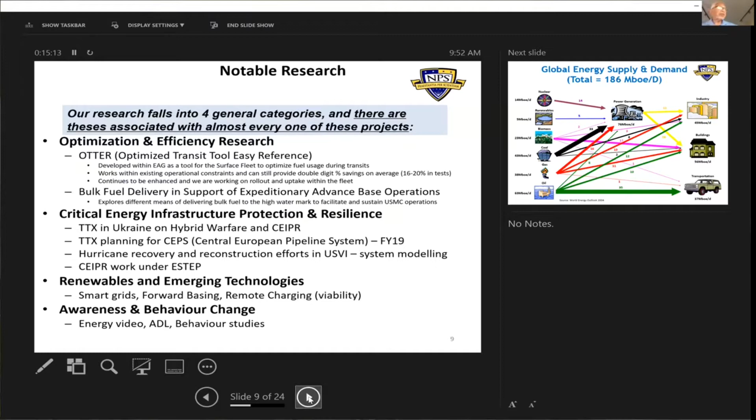So we have a number of nice tools, one of which is called Otter, and you're going to hear from Brandon Naylor later about those kinds of tools. So I put on here some of the research that we've done, just so you can take a look at it. Happy to talk about that further. The next slide, please. I want to shift to a larger picture.

So if you ask how much energy is used, where does it come from, and where does it go, I've got this sort of chart. This is always the beginning of analysis. Where does it come from? Where does it go? So the arrows are from and to. The thickness of the arrows is how big it is. You know, so the black arrow from coal to power generation says, hey, that's a pretty big number.

By the way, over time, the thickness of that has shrunk and gas has gotten bigger. So this is an important thing. It's a bit outdated, but it's roughly right. And if you want to save on energy, you have to look for the big arrows. So at the bottom, the green one, which has oil going to transportation, well, there's an opportunity there, isn't there, in electric vehicles or hybrid vehicles. So that's an important background slide.

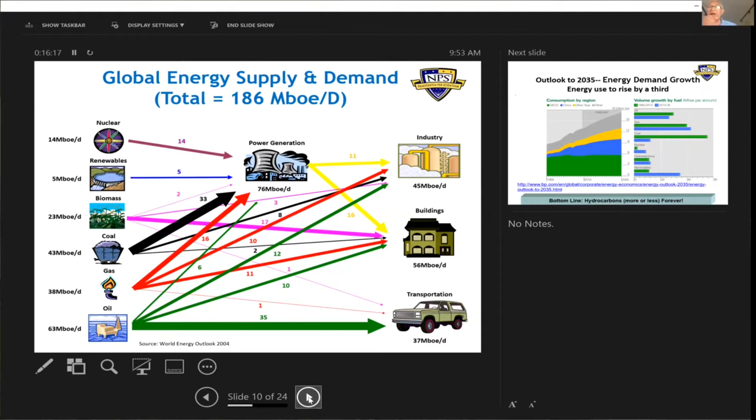Next slide, please. A bit more analysis would show that energy comes from various places and it's going to various places over time. What you see here, as you read from left to right, is that total energy is going up. You'll see later on maybe that actually it's not the Western developed economies that are going up so much, but it's the developing world.

But when you look at that left-hand slide, or the right-hand one, you could come to the bottom banner, which I put up there in a provocative way, which is, it looks like hydrocarbons are not going away. More or less, hydrocarbons forever. You may not like it, but that's what the data suggest.

Now, the IEA has just come out with some new numbers, so the shape and slopes of these curves are a bit different from what I have here. But you know, I still think that bottom line is roughly right. And I think that is a real topic of conversation. You can see where I got that data from the website that is towards the bottom of the chart. Go to the next slide, please.

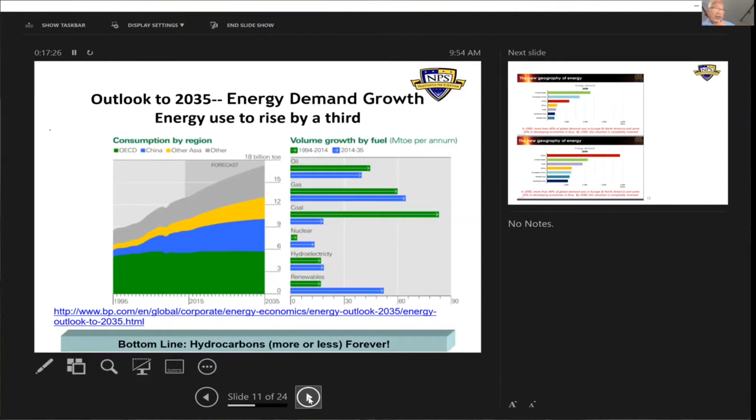You've got Russia's role in European energy, all right? So in each of these, you've got 2017 and then first part of 2018. And what you see is that Russia supplies an expanding percentage of people's energy needs. Is that good or bad or indifferent?

Well, energy security, broadly defined, means not being beholden to somebody. It also means for the supplier not being beholden to a given buyer. So behind this chart are arguments like Nord Stream 2 and energy out of the Caucasus and the ability to diversify both suppliers and demanders. So if you're in NATO or in the European Union, this slide gets to be a topic of conversation.

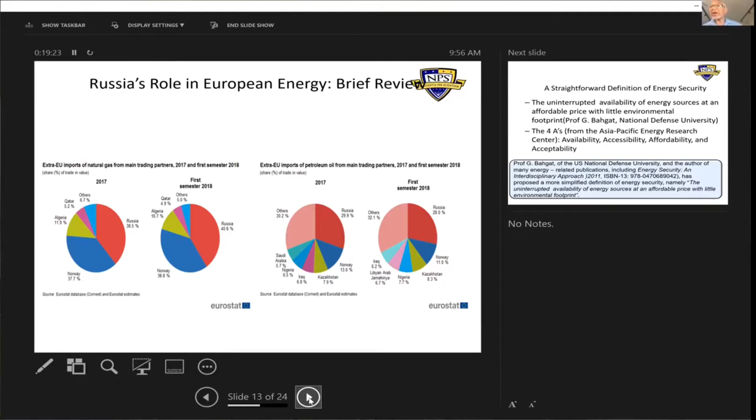Next slide, please. People love to talk about energy security. So I put up a slide on energy security just for sort of a standard. That second dash is 4 A's. Available, so the energy can be found. Accessible, meaning you can reach it. Affordable, you can see it, reach it, and get it at a reasonable price that people will pay. And acceptable, by which I mean sustainable and suits sustainability standards. So that's a definition of energy security. Is that the only one? No, but it's one. Move on to the next slide, please.

I want to talk about one kind of energy that's of very great interest to the Department of National Security Affairs, and that's operational energy. The stuff that drives ships and aircraft and vehicles and bases and things that are used in security arenas. So why is operational energy needed? Well, for the obvious reasons, strategic, operational, and tactical, you see that. You see the pie chart: a FOB, a forward operating base, how does it use its energy? It uses it mainly for environmental control units and water purification.

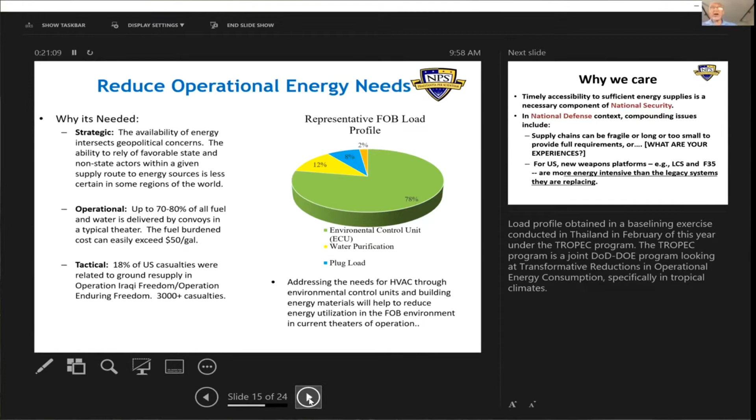So if you're into the expeditionary business of national security, Marines, for example, you get to worry about where am I going to get my energy to run, well, what do you need? Where does it come from? So operational energy needs are important. If I need to spell out further why it's important, take a look at the next slide. And you see some reasons here why it's important, reasons that you know. And this brings us into the region of supply chains. Supply chains can be quite fragile, as you know. And so you have to worry about how we're going to move the energy from here to there, and how much do we need?

So how much do we need would be under the last bullet. Okay, hold on a second, sorry. If you look at that last bullet, recent new weapon systems like Littoral Combat Ship or F-35, which has been in the news, these are more energy intensive than the legacy systems they replaced. So you have the oddity that we need more and we have to push it across fragile supply chains. Go to the next one, please. Next slide.

So security of supply, you can see that there's a problem, whether we're pushing things across oceans or on aircraft carriers, and we get to worry about the cost of things. So this is not an exhaustive list of the things that represent danger to the supply chains for this critical element of energy in the national security business.

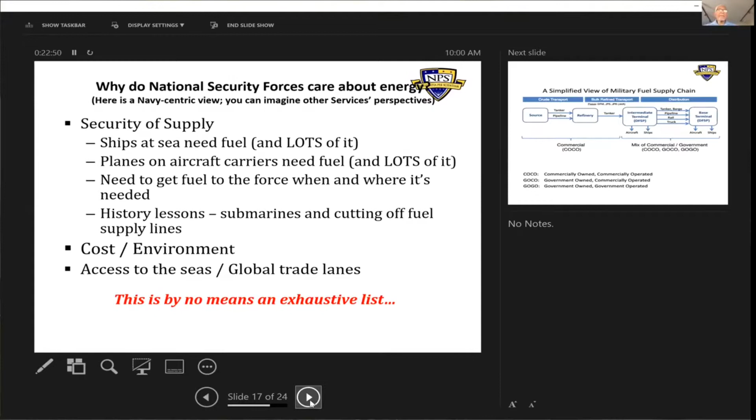So now I want to put on my operations research and cost estimating hat and turn to the next slide and say to you that if you start with a gallon of fuel here and you want to get it to the fleet or forward operating base, how much fuel do you need? How much are you going to use up in that transportation? And the answer is about half. You want to get 100 gallons somewhere, you better start with 200 gallons. Because you can see from left to right how energy gets from here to there. That's sort of a simplified view of the chain.

If you look at the next slide, we have losses associated as you move from step to step. So roughly 2 to 1 is what it costs. So if you can save a gallon where you need it at the end point, you're actually saving almost 2 gallons up front. What could go wrong in these supply chains? I'm on my last 3 or 4 slides. So here's a short list of what could go wrong. These are places where you spend a lot of energy and things can go bad. And if you want a real specific example, take a look at the next slide.

The Straits of Hormuz, like the Straits of Malacca, are very narrow sea lanes through which great deals of energy move. In this case, it's the source of energy. In the Straits of Malacca, between Singapore and Indonesia, you have the place where China's energy comes through. Without it, China lacks about 10 million barrels a day. So there really are risks to supply. I want to end by doing the thing that all academics do, which is what kind of research areas are available on the next slide.

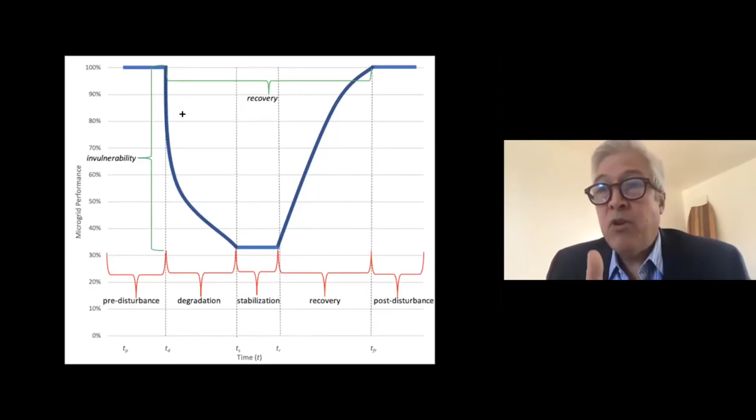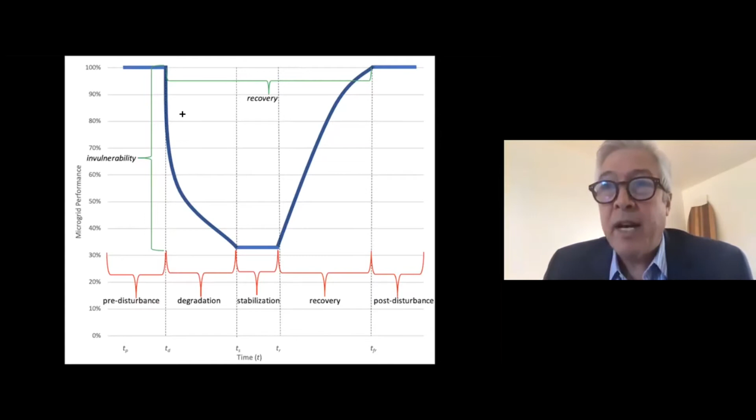And as I mentioned earlier, different than reliability, they're tied to a disturbance that is, in my definition, improbable and severe, but typically we talk about it in terms of HILP, high impact, low probability. I emphasize that because that's the differentiator in what I propose resilience does, in that it's looking at a high impact, low probability disturbance vice a low impact, high probability disturbance that reliability assesses. So this is the lens, if you will, that I am looking at assessing resilience, using those two key measures, invulnerability and recovery. I've developed those mathematically to measure for a microgrid.

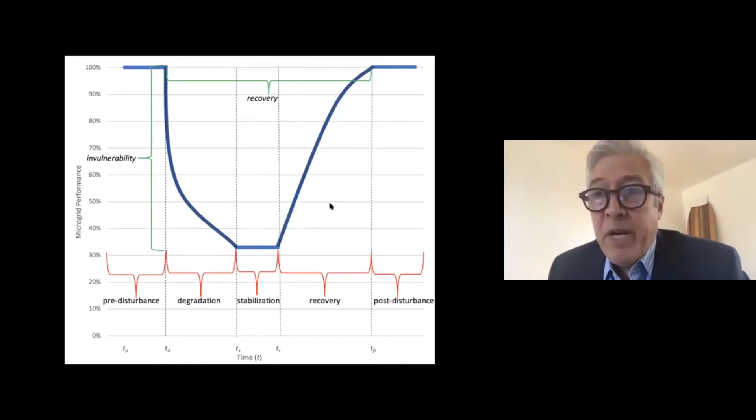And to do that, I built a model, and I'm showing you a quick screenshot of my resilience model in Excel. And why I'm showing you this is so you can get a sense that this tool will take inputs which have to do with the DER, the distributed energy resources: how many, what is the capacity, what type, how many wind turbines, how many solar photovoltaic panels, how many diesel gensets, how many batteries, what power capacity they are, and then you choose the disturbance. In this case, I've chosen hurricane. You just choose your maintenance level that you're investing in.

In this case, I've chosen medium, and then you hit run, and the model will calculate resilience on those two metrics I mentioned, invulnerability and recovery. But more importantly, tying back to what I'm showing you now, is a cost model where for those choices in design, you enter in different cost parameters. You enter in the economic life of the wind turbines. You enter in your weighted average cost of capital. You have to enter your planning horizon, and any distinct assumptions that you might have for the location as it relates to the CapEx, the capital cost, the maintenance costs.

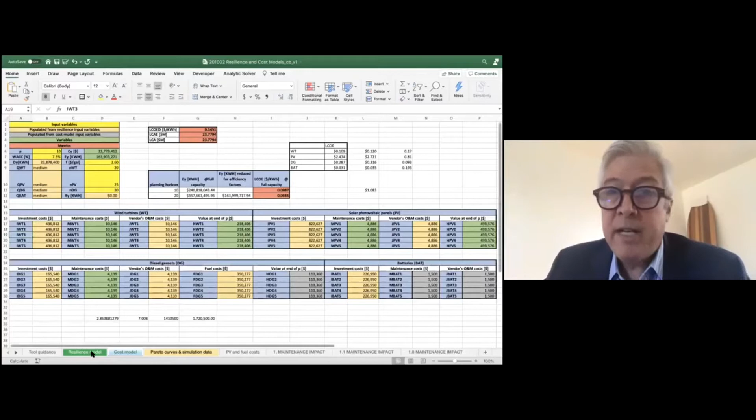You put that all in, and then you hit run, and then the model will generate these scores for invulnerability and recovery, and aggregate those two to get a resilience score. That is the essence of the model based on what I shared from the microgrid resilience curve based on the definition. Now, what's valuable about this that I wanted to share with you is we can now explore the design space so we can better understand which choices in design and maintenance influence resilience and cost.

So one easy basic way that I'm going to show you to do that is what we did at San Nicolas Island, San Clemente Island, and Gitmo. And I'm showing you now, if you look at this graph here, it's a three-dimensional graph, you're seeing 3 different color curves. Red is San Clemente Island, purple is San Nicolas Island, and green is Guantanamo Bay.

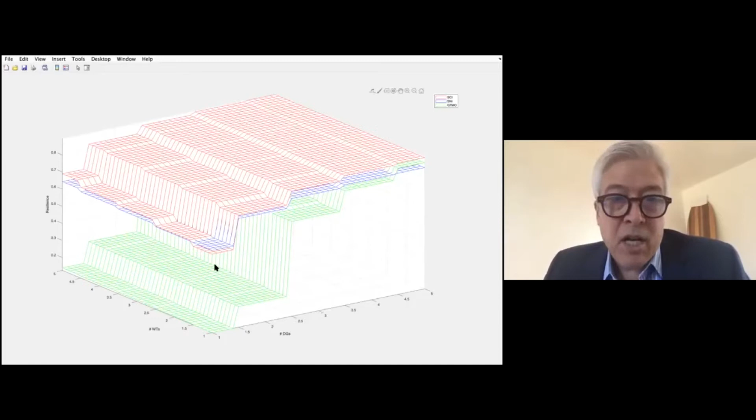So we use the model and it basically allows you to see that if I have 3 diesel gensets and I come into, let's say, 2 wind turbines right here, I see that at my green curve, which is Guantanamo Bay, for that combination of 3 and 2, I would come up to the curve in here, and I would see my resilience at about 0.675 on the curve there. Similarly, then I see at San Clemente Island, I have more resilience for that same combination.

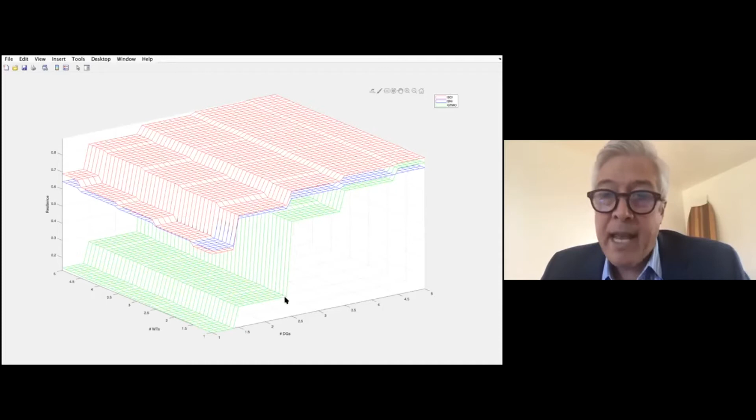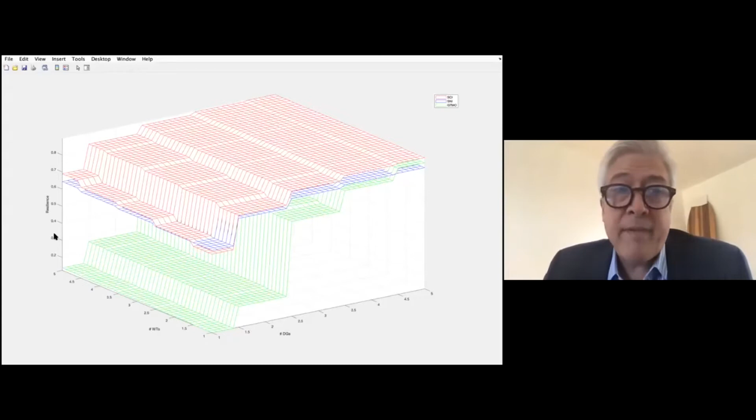But interestingly, I see a big step here, which all that tells us is that at Guantanamo Bay, going from 2 diesel gensets to 3, I see a much greater improvement in resilience than I did at San Clemente Island. So obviously there's some other takeaways, and there's a similar graph to this where we graphed the same choices against cost. So you can flip between the two. Now that can be a bit tedious, but still useful.

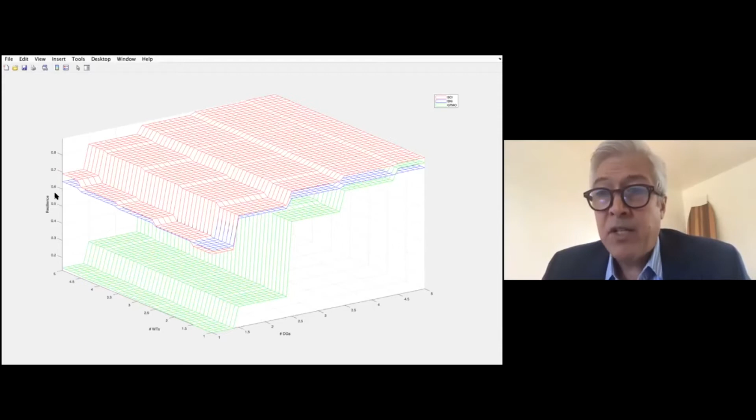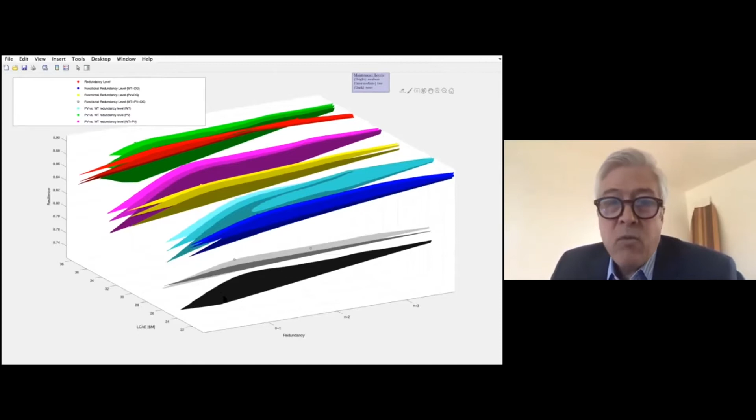And the last slide I want to show you is we looked at this from redundancy levels for different architectures. And this shows you here that I've got redundancy levels from no redundancy all the way to a redundancy level of a triplet, that being out here. And what this is allowing us to see is effectively, as redundancy increases, my resilience increases, but interestingly enough, my cost decreases, okay?

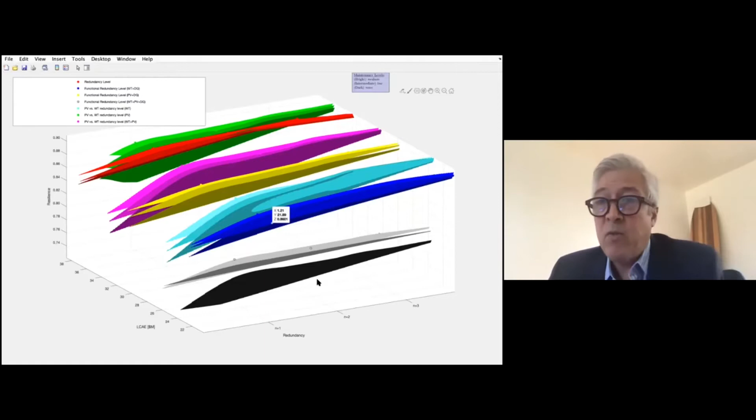And that's an important point and distinction that we could glean from this, and very useful. But other pieces that we can take away from this is, if I look at these gray shapes, this is a shape of a microgrid that had wind turbines, PV, and DG. And it's telling us in that shape, where you see the darker one beneath the gray one, that maintenance, which is no maintenance of dark, matters much more in that combination than it does the other curves, where the maintenance level has little variation impact on the resilience or cost, but it has much more here in this architecture, the gray one.

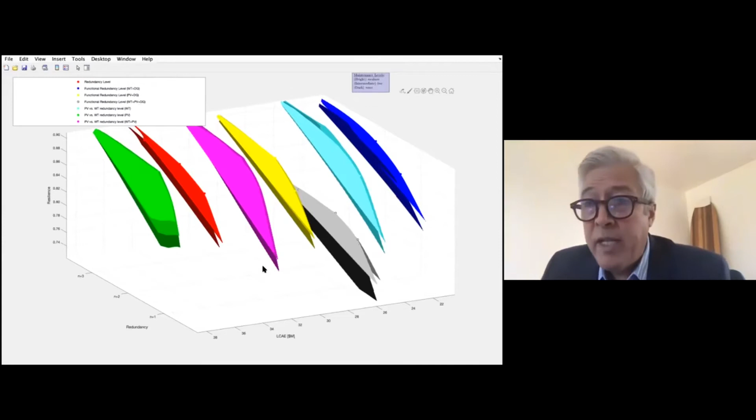So again, in this one, like the last one, we can rotate through this, we can change our perspective. This is through the lens of redundancy perspective. But now if I want to shift and look at it from a cost perspective, I can do this. And you can see I get some other interesting knowledge that allows me to better recommend where we want to be in terms of that redundancy level. But the real kind of big takeaway is more redundancy provides more resilience for less cost.

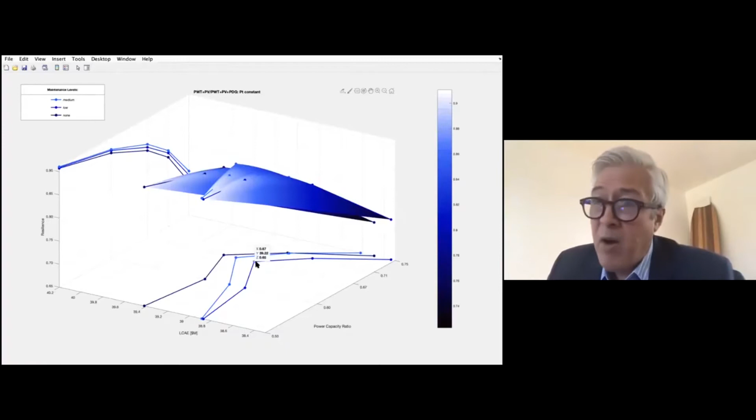And similarly, back to this, the power capacity ratio, we can see, as we look at for this architecture, that there's an optimal point that I want to not exceed in terms of my power capacity ratio, so that I ensure that I'm not overspending for the same incremental improvement in resilience. Unless I want to, of course I can, but I have to be careful here. If I do too much, I lose in resilience.

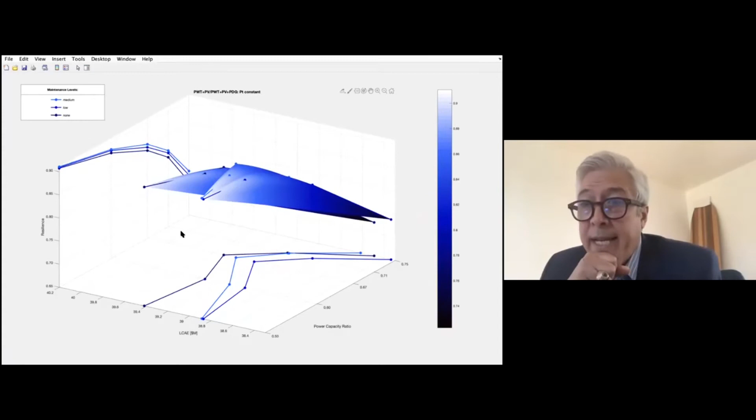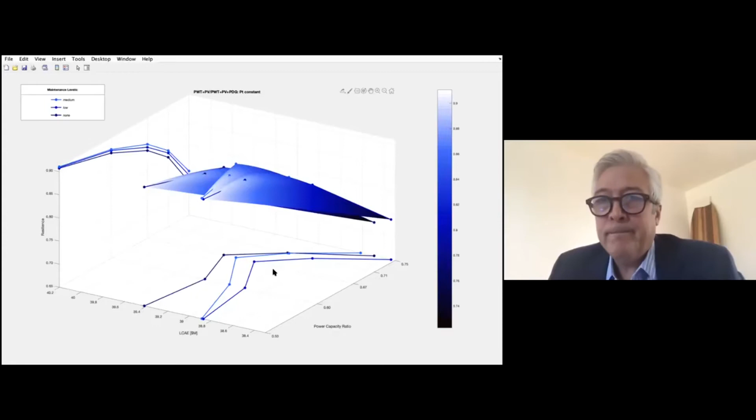So that's kind of the overview of what we can do with this model. Again, the big value, and we're implementing this at Rota, we are working on it at McMurdo for National Science Foundation, is it will allow us to better explore that design space so that we can provide a decision maker their ability to choose an optimal point of resilience versus cost. And that's the extent of my model, unless there's further questions.

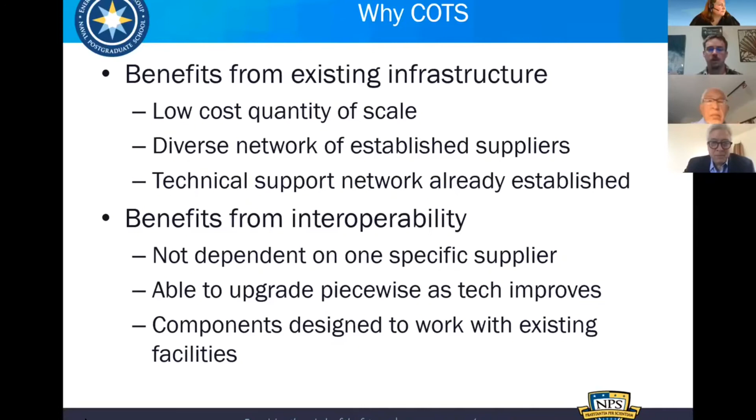So one thing that we've worked on here at the Naval Postgraduate School that we're looking to expand in the future is a microgrid lab using this technology for students to conduct their experiments with. Because the technology used in this system is agnostic to whatever's plugged into it, we're able to hook up any type of technology the students want to experiment with, such as new types of solar generation, or see how effective wind turbines are at different locations.

We're able to test different means of storage and data collection. This is really just a playground for microgrid experimentation, and we're hoping to see more of that in the future. And with that, I'll open it up to any questions.

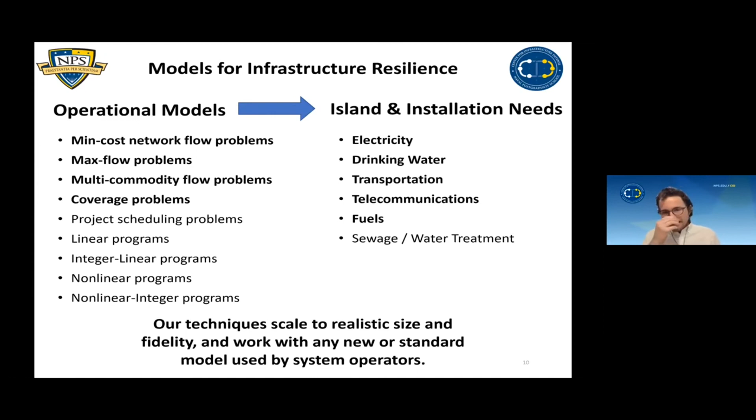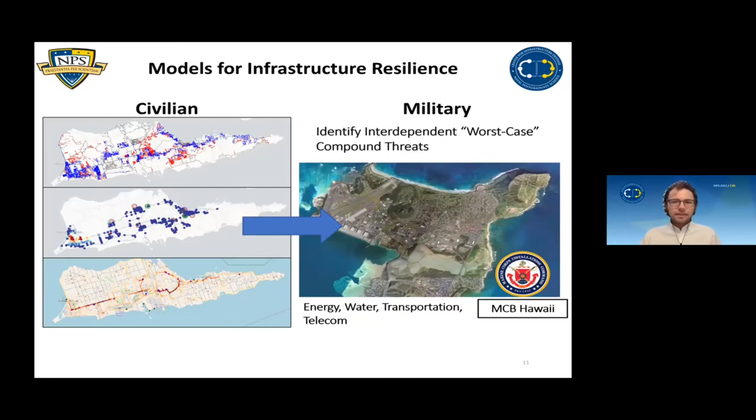A lot of the work we're doing right now is taking these models we've developed for civilian systems and applying them to military systems. And the way that we're making that link is not just through the technical approach for modeling power, water, transportation, telecom, fuels, but also trying to link it to DoD-specific measures of performance and understanding of mission.

And in particular, when it comes to how infrastructure supports missions on our installations, there's two key performance indices: facility condition index, which is essentially a measure of quality of our infrastructure. Is it dilapidated or is it brand new? Is it going to work for our mission's purposes?

The second one is the one we're really focusing on, which is mission dependency index, which is a measure of capability, which is essentially saying how well does this infrastructure support mission? What are the critical missions at these facilities? Which ones are interruptible and which ones need power all the time? And these relate very closely to a lot of DoD requirements for installation resilience.

So across all services, we have requirements or plans for having like 7 days of energy given a blackout on a civilian grid, or if you're like Army, 2 weeks of energy and water. Air Force is 7 days. Marine Corps has talked about 2 weeks of multiple systems, no specific requirement yet. But all the work that we're doing is towards this robustness of our installation infrastructure systems to make sure that our missions that require these critical services to operate can remain operational given disruptions to these larger infrastructure systems that are supporting them.

And getting more detailed on mission dependency index, there's essentially three key factors that are being considered when you're trying to determine how well this power grid might be supporting mission. The first one is interruptibility, which is essentially saying, if this facility were to lose power, would that interrupt critical missions on this installation? The second two are relocatability and replaceability, essentially saying, is it easy to move this mission to another facility, or is it very, very difficult? Or is it easy to replace the equipment or the facilities that this mission requires with something else?

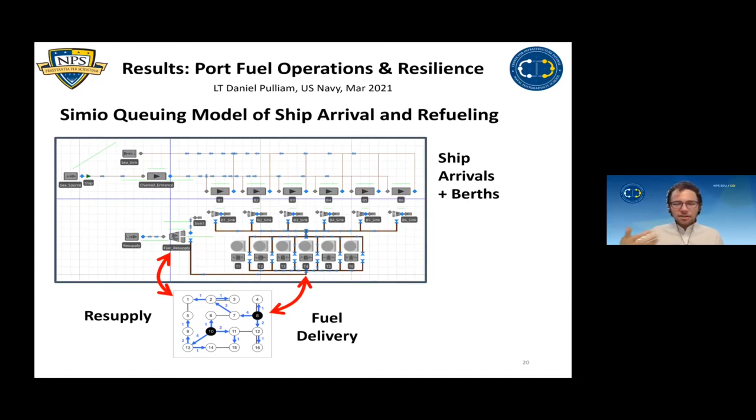Daniel Pulliam is looking at how we actually get that fuel to the ships and how well we can serve ships if we have storage tanks and berths. And what he's finding is how we can actually model the real mission and how it changes over time given disruptions to our infrastructure. And so we have a percentage of fuel ships that we want to fuel per day, and under normal operations, given a couple of tanks,

we actually are able to serve well over 90% of all the ships that arrive every single day with high reliability. When you have some form of missile threat or disruption, you have to have many, many more storage tanks as backups just to make sure that you can serve that same number of ships that might be coming to support the warfighter and project power.

And this information is now linking to that network operations view that we had in the previous studies to the actual operations that are going on at a port for resupply, refueling operations and missions. And this is leading to actual recommendations to NAVFAC, Civil Engineering Corps, for how they would invest in protecting fuel operations and missions, given the information of the vulnerabilities and the actual operations at our installations.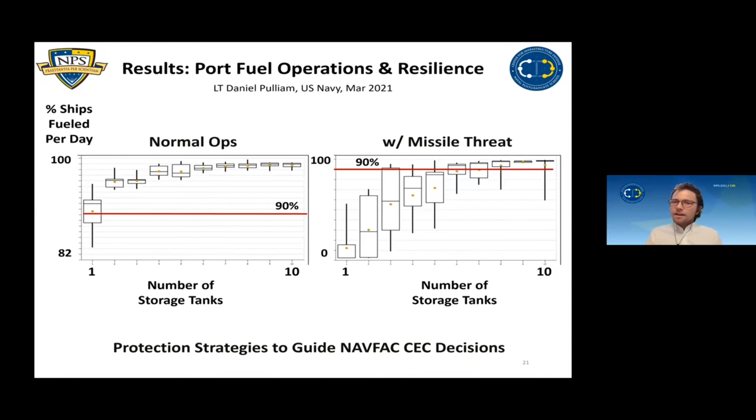And so the current efforts that we're working on for energy resilience is... We have about 1 minute left. That's perfect. This is my last slide.

So the current efforts we have are linking all of these studies together to better understand interdependent effects across energy systems, how they relate to our understanding of mission dependencies across our installations, and then how that relates to the actual operations and changes in dynamics over time as ships need refueling and how they arrive and leave, and how the ports actually support the warfighter and projection of power. And so this is the work that we're doing at the Center for Infrastructure Defense.